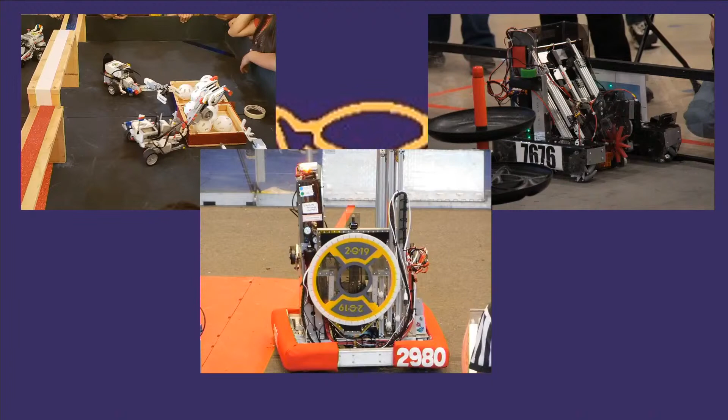Here at the Robotics Club, we don't just build robots, we build people. I mean, our robots are really cool, but we also use the things we learned from our robots to give back and improve our community.

Some of the things we do are big. We built and repaired animatronic deer used to catch poachers. We used 3D printers to make prosthetics for children with disabilities. We designed and made haptic devices that use range-finding sensors to help sight-impaired people improve their sense of direction. And we designed and built 2 self-contained microhomes that are donated to provide housing for the less fortunate.

But some of our projects are smaller. We help build and install wheelchair ramps for community members who need help getting into and out of their homes. We organize blanket drives to collect warm covers for people in the cold. We work with schools to build sheds for their teaching gardens.

Our work in the community is why we say it's not about the robot. Now it's your turn. We are challenging the classes, clubs, and groups of students in our district to make a difference in our community. Starting today, form a group and pick a community service project. It doesn't have to be big. Everything that helps makes our community better.

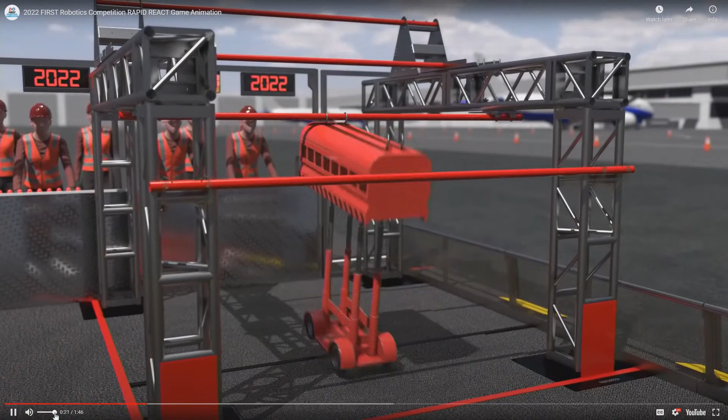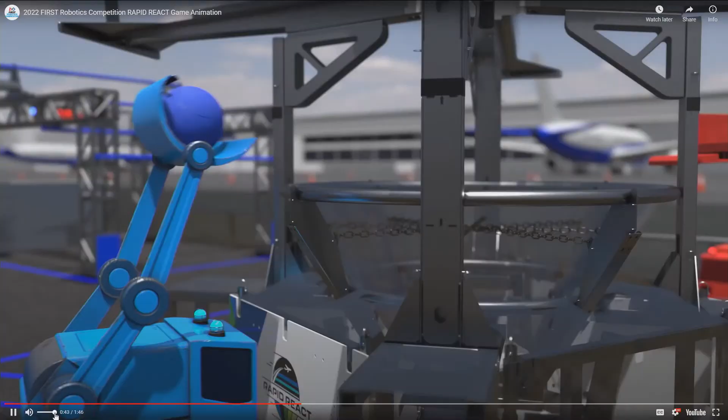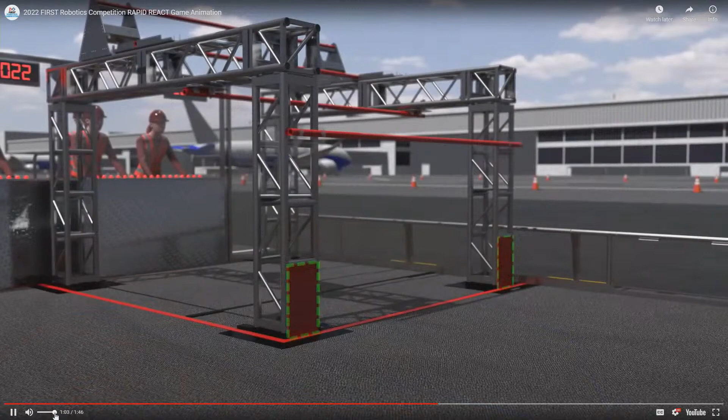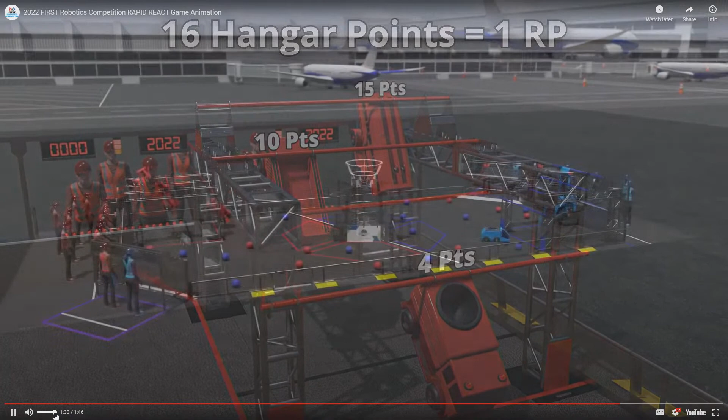Presented by the Boeing Company. Two alliances of three teams each compete to score their cargo balls into the lower hub and the upper hub. They earn additional points if the robots traverse the rungs of their hangar. Robots start each match on one of their tarmacs and may be preloaded with one cargo each. During the first fifteen seconds, robots are autonomous; without guidance from drivers, they leave their tarmac, score preloaded cargo, and collect and score additional cargo. During the remaining two minutes and fifteen seconds, drivers control their robots. They continue to gather up two cargo at a time and score cargo in the lower and upper hubs. Cargo scored into either hub counts towards the cargo bonus. Launch pads protect robots from contact by opponent robots. Robots may use either terminal, where their human players assist the robots with acquiring cargo. As time runs out, robots race to their hangar and traverse as many rungs as possible. The higher a robot gets, the more points it earns. An alliance that reaches a hangar point threshold is rewarded with a ranking point. The alliance that earns the most points wins the match.

All right, so here I am with Jack, one of the members of our team. So Jack, what do you think about this year's game? I think it's exciting. It brings a lot of cool game elements to the table and gave us a lot of interesting challenges with designing, especially with the climbing. Do you think we're going to see a lot of robots climbing past that mid-level? I think it's a really hard challenge, but one that a lot of teams are going to shoot for.

And then, what do you think about the hub? You've got to get the cargo, those are the balls, into the hub. What are your thoughts on that? Do you think there's going to be a lot of high goal, or mostly low goal? I think it's going to be mostly high goal, with very few exceptions of teams that can do it really fast and low goal. Okay, all right, cool, thank you. All right, thanks, Jack.

So, let me see. Welcome to the... All right, so Isaac's going to come back and talk about Swerve Drive. Our teams, all of our design teams, chose to work with a new drivetrain this year. We're looking at Swerve Drive, which is a new type of drivetrain.

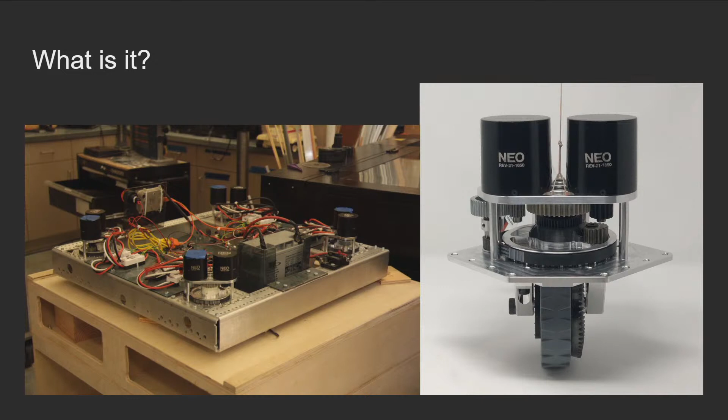Unlike other drivetrains we've used in the past, such as Mecanum or Tank Drive, where you rotate the robot to drive straight, and with Mecanum you can strafe but can't turn and strafe at the same time, Swerve Drive is super maneuverable because all four wheels, one in each corner, can turn in individual directions. This allows you to go in a specific direction and rotate while moving at a pretty high rate of speed. There's also no pushback because your wheels are actually pointing in the direction you want to go, whereas in Mecanum, when you're strafing, your wheels aren't actually pointing that way.

So some of the pros and cons, as I've already mentioned, it's highly maneuverable, extremely fast, and you're not going to be pushed around much on the field.

We already have a working, mostly working, Swerve Drive set up in the classroom right now, but the issue is we've never actually used Swerve Drive in an actual competition, so we're kind of new to how it works. We haven't done extensive repairs on it when it's fallen off a climb or anything like that, but we'll work on that. You've gotten it working initially, but obviously for competition we need to take it all apart and put it back together again, which is good because everyone will learn how to do that. But you've never used it in competition before. Realistically, as a team, we don't have any experience with it outside of getting it working during the off season.

The program is also much more complicated than a standard drivetrain. A standard drivetrain has left and right sides that operate independently of each other. Whereas with this one, you have four wheels, two motors per wheel, and you have to program it so the wheels are all facing the correct direction as it's moving. It's a little more complicated, but I think we can do it.

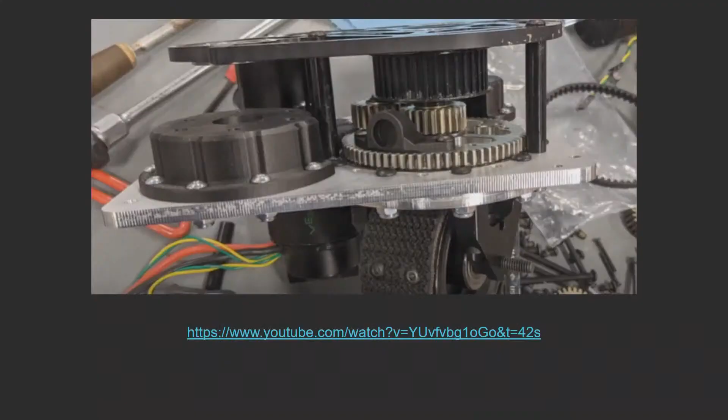So there are some cons to using Swerve Drive. But it is extremely maneuverable. Wait, oh not yet, what are the cons? So we've never used it before. Yeah, it's complicated to program. And there's another con there, there's two more cons there.

Well, there's not a lot of replacement parts, mainly because we have version 2, but they have version 4i. It's kind of like an iPhone, there's the latest and greatest, and we have like an iPhone 5. Basically we have the old iPhone while they're on the latest version, so we can't get replacement parts. There is a conversion kit you can buy to convert to the latest version, but that's also a lot of extra time we may not have for this season, and it's also almost as much as a brand new module.

That is true. So the other idea is to basically get the parts we can get, and get some of the parts made for us using one of the 3D printing houses we have access to through FIRST.

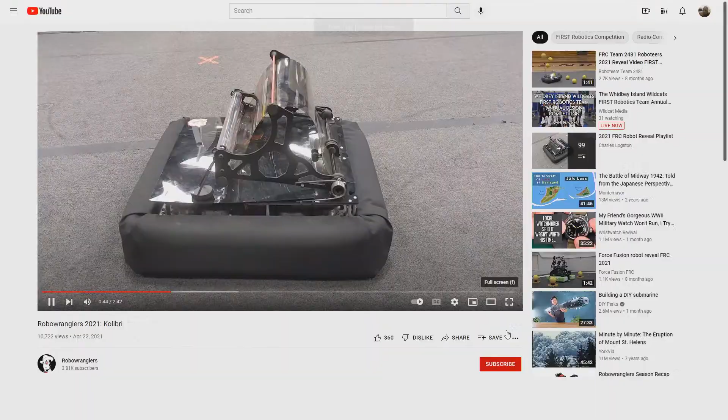All right, so you want to go ahead, now we're going to show the video? Yep, so now there is a video that we will share with you of another team from last year demonstrating Swerve Drive and how maneuverable they were able to be on a large field.

That one, this is Robowranglers. Yeah, but is it sped up? No, this is real-time speed. So this is how fast it can go, basically real time. This is also one of the best teams in the country. Well yeah, that too, they've done some tuning, let's just say that. It's a great way of showing some of the capabilities of Swerve Drive.

That is pretty incredible. So that's a top view of the robot. Yep.

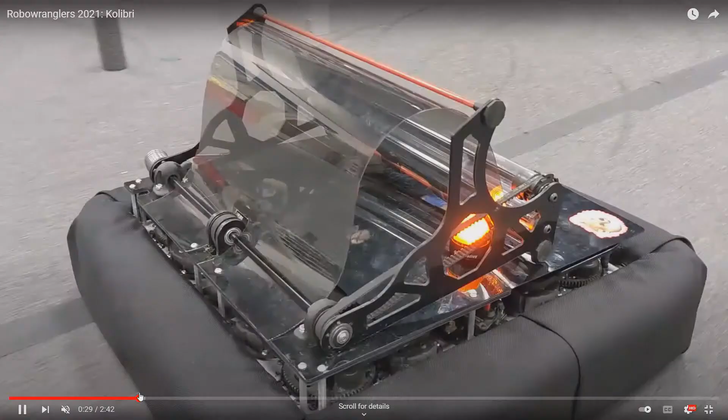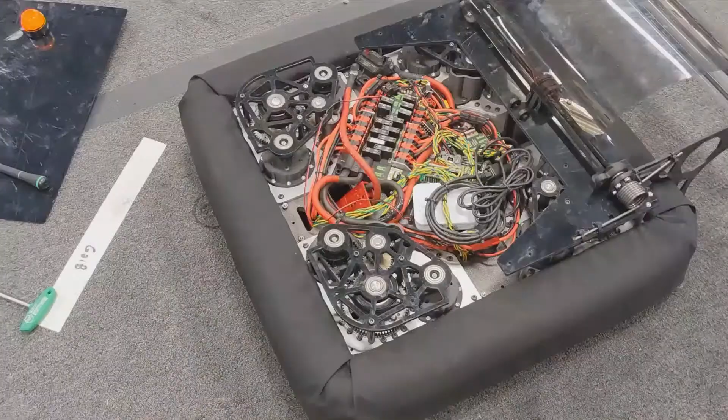I think they might have had a not top view. Alright, so that just kind of, you can see the Swerve modules inside of there. Now that's a different version than our version, right? Yeah, I believe they have the 4i. Yeah, that does kind of look like the 4i there. That actually looks like they just made their own custom. Yeah, anyway. Alright, well, thank you, Isaac, for sharing that with us.

In Tele-Op, which is up next right here, the Tele-Operated Period, this is when the drivers of the robot actually drive, as opposed to the robot driving itself. We will be taking advantage of the bottom hub as opposed to the top, so we can score 2 balls at once. Some specific reasons for this would be because it is faster, more reliable, and we don't need any time to aim.

So our reasoning is, on the top hub, you get 2 points. On the bottom, you get 1. So it sounds like the top hub is the big place to be, that's where you want to go. But there is a big but. We will be so much faster on the bottom that I think we will be able to get almost as many, if not more points that way, because we don't have to line ourselves up to aim. We don't have to wait for the balls to shoot. All we have to do is roll up to the side of the hub and dump them in. Just like that, 2 balls.

Instant score. One of the big reasons for this is because if we get 20 balls scored, whole alliance, 20 balls scored across the entirety of the game, we get an additional ranking point, which is very important because ranking points are what decide where you rank in the competition. If you win, you get 2 of them. So even if we lose and get 20 balls, we still get a ranking point, which sounds pretty stinking good to me.

At the end of the Tele-Op period, we will attempt to do a climb onto the hangar area. Now, we have thought again of time and efficiency and different aspects that come in. So we've decided to only shoot for the second bar for 6 points, because a climber mechanism to get any higher would take up too much space, it'd be hard to maintain, it'd get in the way of other things, and getting to the second bar would be much easier for not that big of a loss of points. One that could probably be almost made up by the time we would save not climbing.

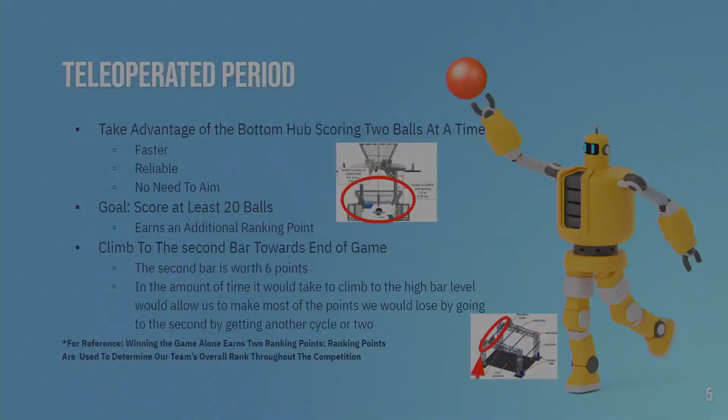Let's see who's next. Our drivetrain, like me, Isaac, and Mr. Yoga mentioned, our drivetrain is Swerve.

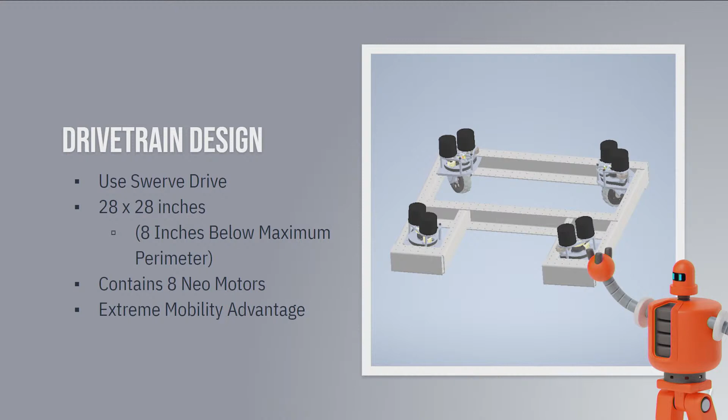Our Swerve will be 28 by 28 inches, 8 inches below the maximum. One other big downside of Swerve is it takes up 8 motors, half of our allowed motors.

There's extreme mobility. Swerve can move in almost any direction, and in the video before, you guys saw how fast Swerve can move.

Our intake system is a mechanism that allows the robot to acquire and store game objects. It consists of multiple wheels placed through a metal rod, and these wheels rotate inwards to take in the ball.

Our intake system is designed for speed, so as soon as the robot goes over a ball, it immediately takes it in. Once an alliance ball is sucked into our robot, it moves up through a conveyor belt that carries it to our outtake system.

Another example for part of our intake is we will have a bar of mecanum wheels on the front of it. That way it takes the balls towards the center where it needs to be to intake them.

Outtake. The outtake consists of a bucket that's about 3 feet 5 inches above the ground, which is how high the bottom shipping hub rim is from the ground.

When the conveyor belt intakes the balls, it drops them into the bucket, which then flips over a little past 180 degrees into the bottom shipping hub, once we're close enough to it.

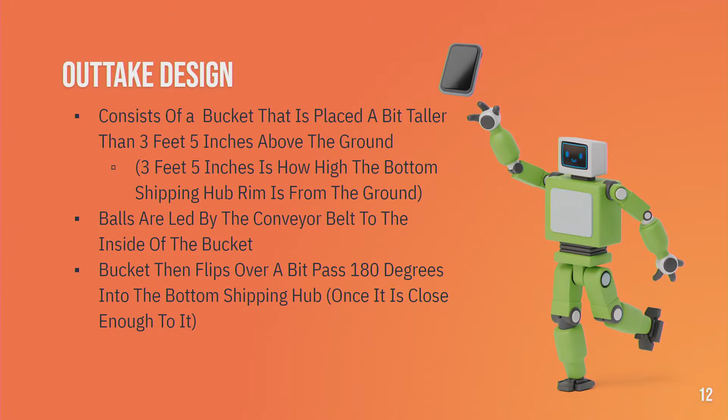Here are some of our drawings and CAD models that we've made of the bucket so far. You can see in the little drawing in the corner, which I drew myself - I'm very proud of it, it's pretty cool looking. You can see our intake with our green wheels going up the conveyor belt into the bucket in the back, which has actually flipped over, and you can see one of our red balls falling into the lower portion of the hub. This is a pretty general idea of what it's going to be doing, and we hope that this will be just as fast as anybody else.

Our climbing. Our plans are to have our robot climb to the second bar in the hangar area.

It's a set of linear slides with hooks attached to the end. It's very similar to the design we've used in previous years, with a linear slide that will go up, a hook on the end, which we can attach to the second level bar, and pull our robot up to get our 6 points.

This year it's slightly different. Instead of using a winch, we're just going to hang on the 2 bars mounted on each side of the robot.

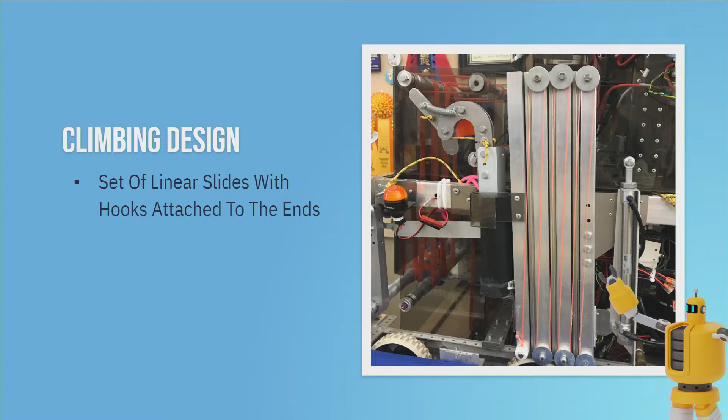Thank you guys. Got any questions? So we're going to do a question session afterwards. Okay, we'll come back to this.

Awesome, thank you guys, thank you for your presentation. Why don't you guys send in the next team? Send in the next victim. What am I getting? Who are the next people? I don't know who they are. They're right in the hallway.

Alright, so in case you were wondering, this is an example of the cargo. It's a large tennis ball. It's pretty lightweight, and they're not perfectly round.

Alright, so next up we have Mayonnaise, and Connor's group with their robot Mayonnaise.

This is our robot called Mayonnaise, and I'm Danny. I'm Connor. I'm Jonathan. I'm Aiden.

Let's get started. Our autonomous period plan was to first score a preloaded ball that was in the robot before and get it into the hub. Then once we do that, we were going to taxi away from the tarmac, which is the blue and red zones located next to the hub, for the points.

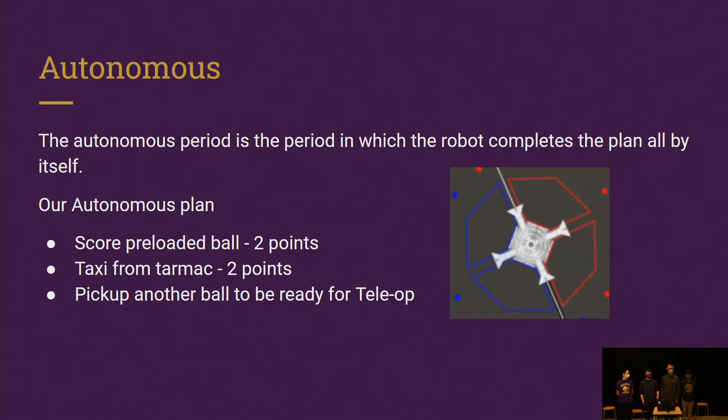Next, our Tele-Op period is the bulk of the match, and this is where we're going to want to be scoring most of our points. Our focus in this match is to have as many balls scored into the lower hub as possible. This would make for a good cycle time to be our best option, and so we want to move fast and pick up balls quickly to maximize the points we score.

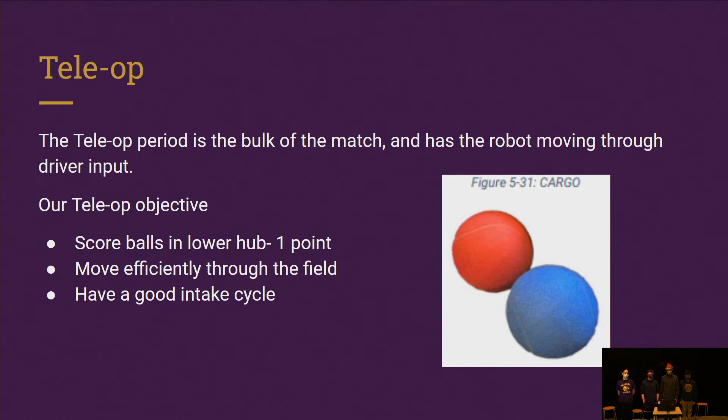Towards the last 30 seconds of the game is end game. Our plan is to shoot our last few balls into the lower hub and rush to the lower pole.

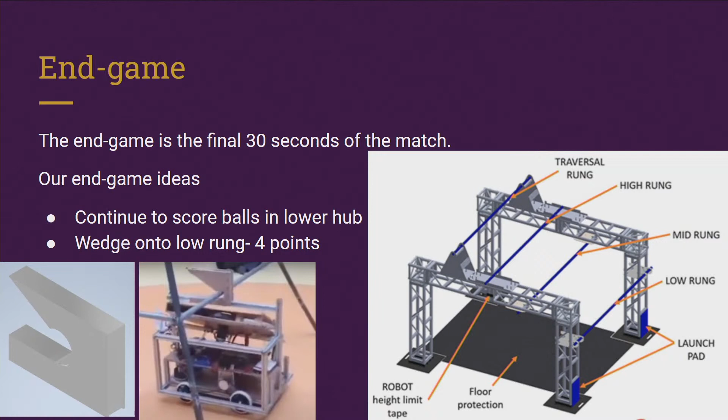We chose to use the Swerve Drive to maximize the amount of speed we can use in our robot, given the route we're taking for scoring points.

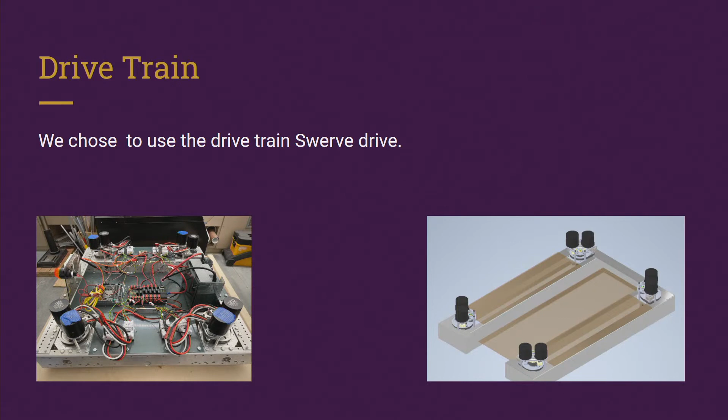Our intake-outtake system, which is going to be the most important part of our robot, we thought of using a conveyor belt with Velcro because we know Velcro sticks very well to tennis balls. So our idea was that we would roll up to the tennis ball, move the conveyor belt, pick it up, and then dump it off right at over top of the lower hub.

And then we have a 2 conveyor belt design, which would allow us to carry the maximum 2 balls at a time and not have to cycle through a ball and pick it up again. Instead we would just be able to have 2 and drop both of them off, allowing for a faster and more efficient cycle time.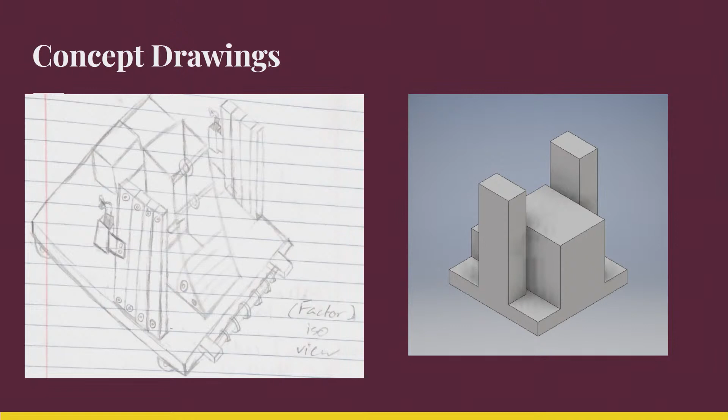Our drivetrain we chose was a Swerve Drive. The Swerve Drive has 4 wheels and 2 motors per gearbox, which is 8 motors. The Swerve Drive has more maneuverability than the regular chassis, which is lightweight. Our Swerve Drive has a gap at the front for the intake. The problem with the Swerve Drive is that it's more difficult to build and program. Our team has no prior experience, and there is minimal access to spare parts.

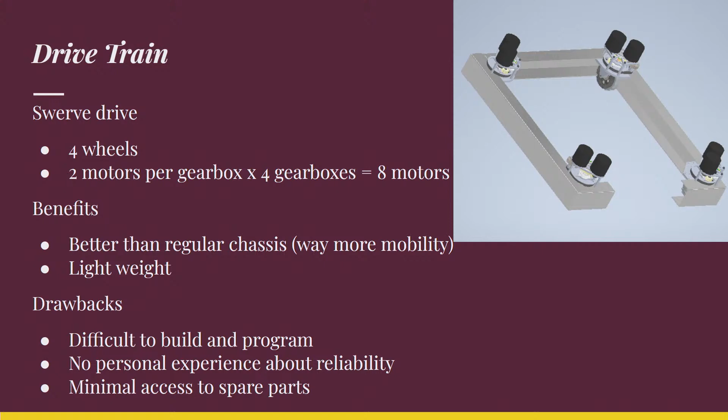So for our intake, we would have multiple wheels on a bar, and it would flip down and extend out a little bit. When we run over a cargo, the wheels would spin, and it would intake the cargo into the robot. The pros are, it is reliable, and we have used this type before. Another pro is that it should be quick, depending on what motor we have, because some are faster than others. Cons are that it sticks out of the frame.

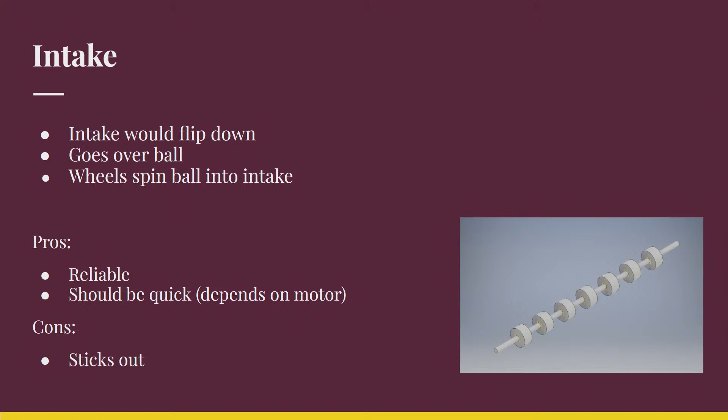You do not need to adjust the position of the launcher every time you shoot. Also, the con is that the piston could lock up. You also can't adjust where the tower is aimed, and basically the launcher could be in the way of the hanger bars.

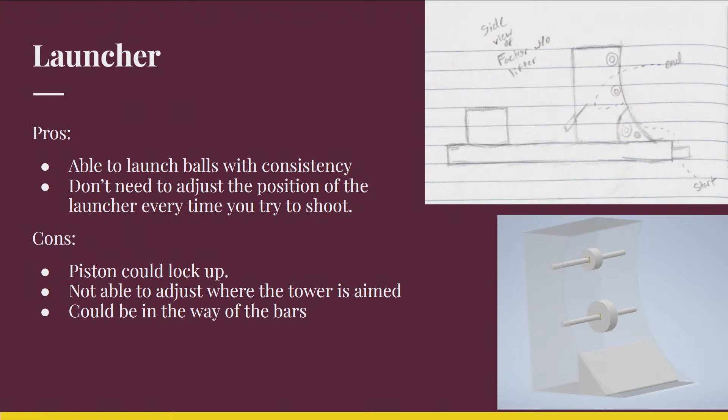Now onto the climber. Our idea for the climber is going to be basically the same as what we used last year and the year before. We'll have a linear slide system where it will slide up on one side and put the hook onto the bar. Then on the other side of the robot will be a winch feeding a rope through a pulley in the center of the robot, which will allow the robot to lift itself up using the winch.

The pros to this is that we've used it before and we know how to fix it if it breaks, and it's fairly reliable. The biggest issue with it has to be that it's a hassle to reset after a match, because then you have to stuff the rope back into somewhere in the robot so that it's not laying around.

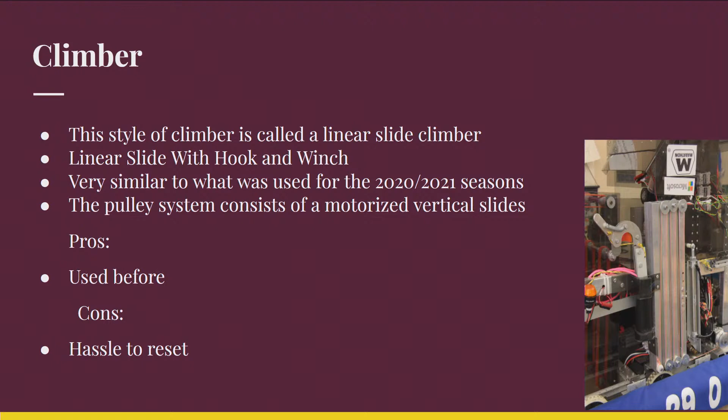For our game plan, we'll leave the starting area and score a few points for that, then we'll try to score 2 cargo in the upper area. We'll score the cargo that's in the robot, and then we'll try to use a vision system to grab another piece of cargo and score a second piece in the top goal. For Tele-Op, we're hoping to score at least 8 cargo in the lower goal. And then for the end game, we would be using our hanging mechanism climber to climb up and hang on the middle rung.

Yep, thank you. Alright, awesome job, you guys. Thank you.

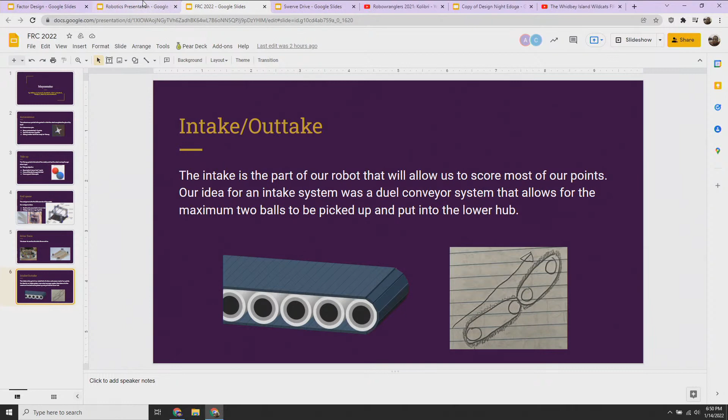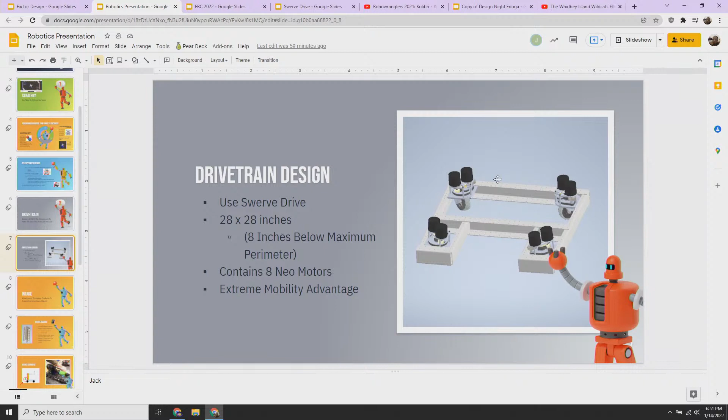Let me find the drivetrain, because that's where it would be. All of our electronics would be towards the back of the robot, that way we maintain easy maintainability, so we can quickly switch batteries and maintain the electronics. For our design, it would go back here basically, we have a section in the back for electronics.

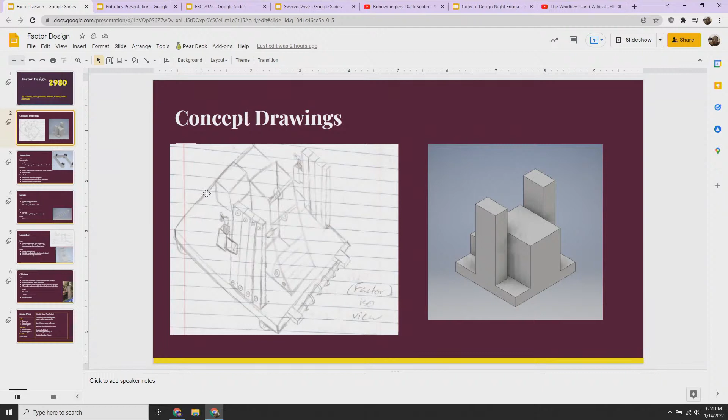What motor is the launcher using? Is that for all of us? We don't have launchers, okay so for ours, probably Neos is what I'd say. Rev Neos, or Neo 550s. Yeah, regular Neos, not the 550s. But the closest thing to a launcher on our robot is our intake, and it's using Neo 550s.

For the team with the actuated dumper, how do you guys plan to actuate it? We are going to actuate it using pneumatic cylinders. Alright.

How much RGB do you intend to decorate the robot with? There will be Mr. Blanky, but besides Mr. Blanky, there will be no RGB. It's disappointing, except unless we have an abundance of extra power, and I decide I want to go RGB crazy.

Do you guys know if we can practice with Anacortes this year? I do not know. Are we practicing with Anacortes this year, or can we? Anacortes, I do not believe is doing FRC this year. Okay, so that sounds like it would be a no.